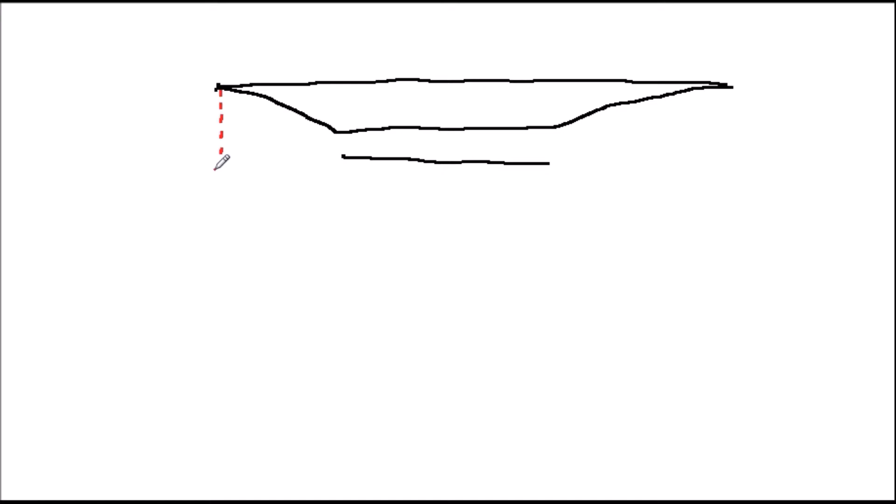In an attempt to solve a scramjet problem, there have been a few radical attempts to circumvent the issue of combustion altogether by removing it from the system. One of the best known of these is the MHD Ramjet. MHD stands for Magneto Hydrodynamics.

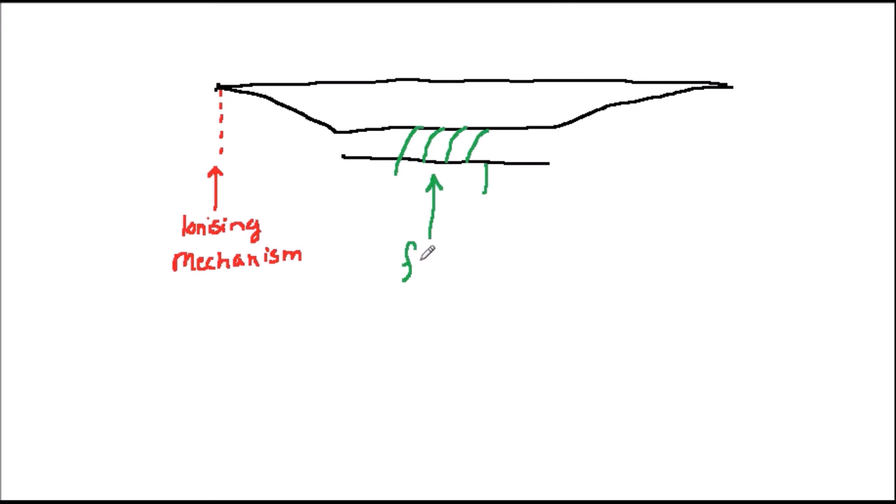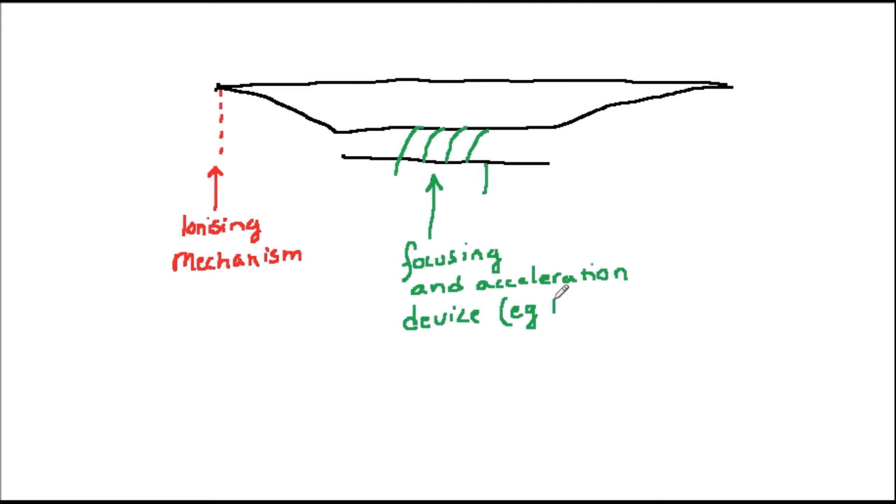The idea is this: if you could ionize a flow as it came into the engine, then it could be manipulated with magnetic or electrostatic fields. An example of such a system is shown in a diagram. At the intake of the engine is some device which ionizes the airflow. Air can be ionized by electrical discharge, radiation, heating, or by some other means.

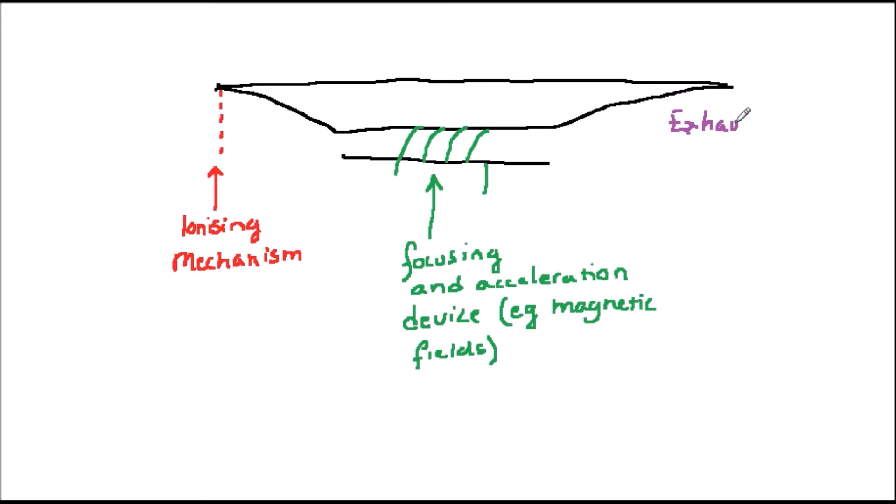The ionized air is charged and is a conductor, and therefore it can be focused or accelerated using magnetic or electrostatic means, rather like metal through a railgun. If it is accelerated out the back of the vehicle, then thrust may be obtained. If the flow can be ionized like this, there are many other possibilities also.

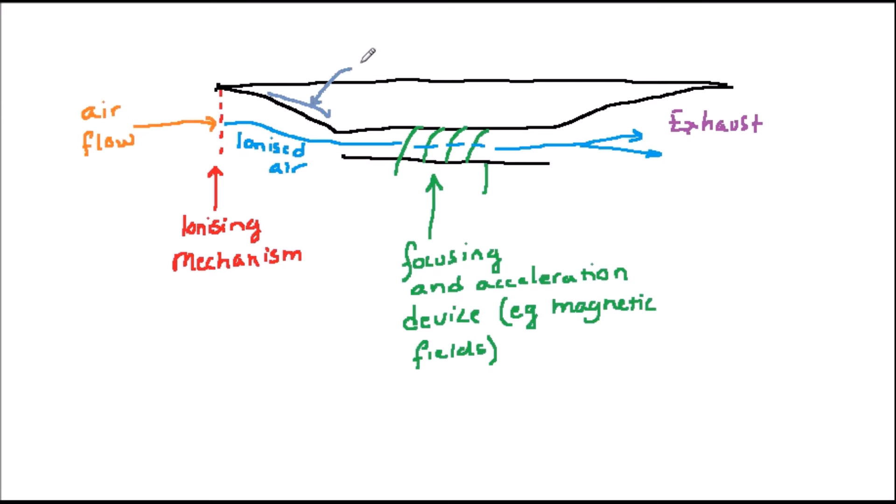For example, it may be decelerated at the input and give up its kinetic energy as electricity. This electricity could then be used in the acceleration process. Not only this, but there are numerous other methods of heating or energizing a flow within the engine. These include activating it with electromagnetic radiation, heating it with ohmic methods, that is, running large currents through it,

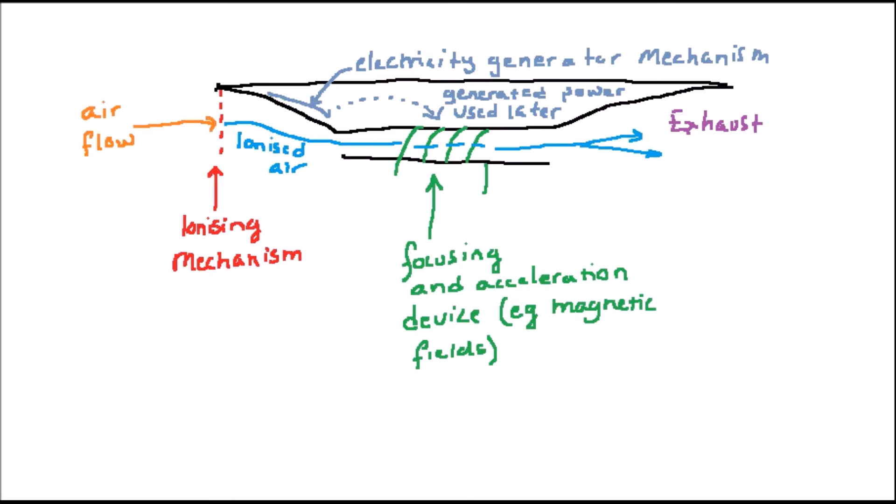and others. It might even be possible to inject fuel and burn the result, producing a hybrid system with more conventional combustion methods. All this sounds too good to be true, and perhaps it is. The principal problems with the system include how to ionize enough of the flow. The methods mentioned a moment ago can't handle this much air.

Some other possibilities do exist, but many of these involve adding extra material into the flow, and we've just spent several videos exploring the difficulties with this. Although, if a rotating duct mechanism discussed in the video on fuel pellets works, it could also be used for this purpose. Another problem is power.

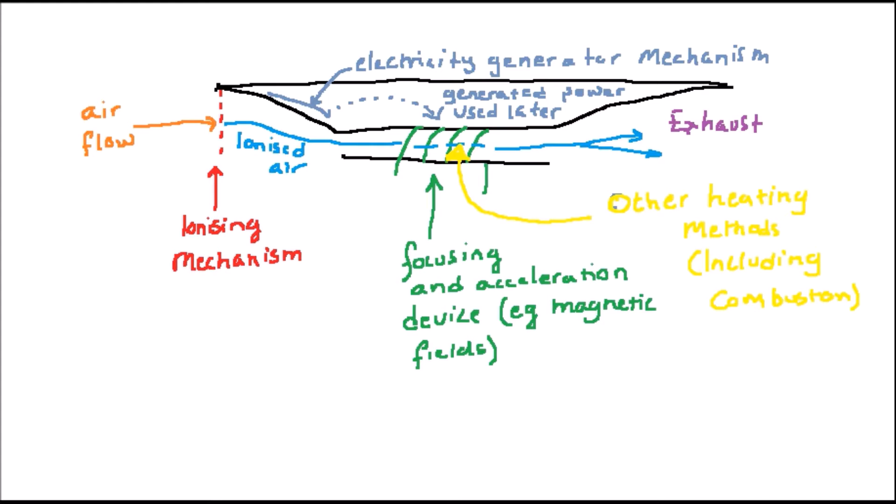Even if we extract energy from the incoming flow by slowing it down and generating electricity, losses mean that we would have to supply more from somewhere to get the system to work. So perhaps this system will come into its own when other sources of power become available.

Another possible system which also needs added energy is one which uses electromagnetic radiation to heat the air flowing through the duct directly. The oxygen and nitrogen molecules in the air resonate at several possible frequencies, and rather like water in a microwave oven, it is possible to use this effect to heat the stream. This is known as EMA, or Electromagnetic Activation.

Again, this idea would become much easier if other substances could be added to the stream. And again, this might be possible through the rotating duct system already mentioned. But again, this isn't a feasible system in its basic form without some new or different way of supplying power.

Others have suggested combining the duct with a gas dynamic laser effect. Gas dynamic lasers are generated by flows of gas to transfer heat out of the duct or between different parts of the flow. Such electromagnetic manipulations of the flow have also been suggested as a way to enhance mixing in more conventional vehicles too. For example, by boosting normal diffusion with forced types, as mentioned in earlier videos.